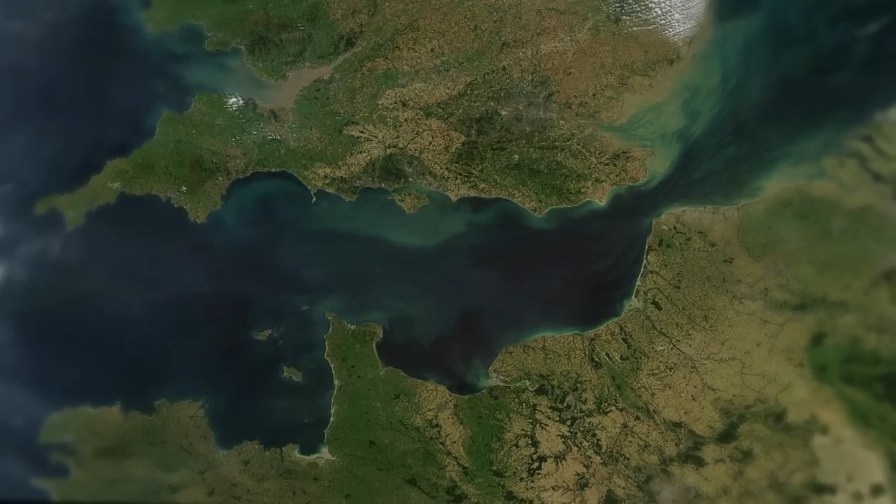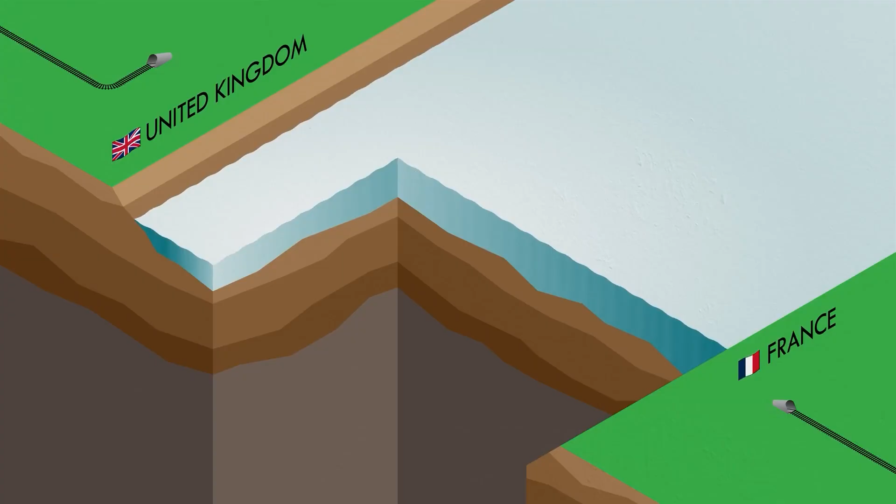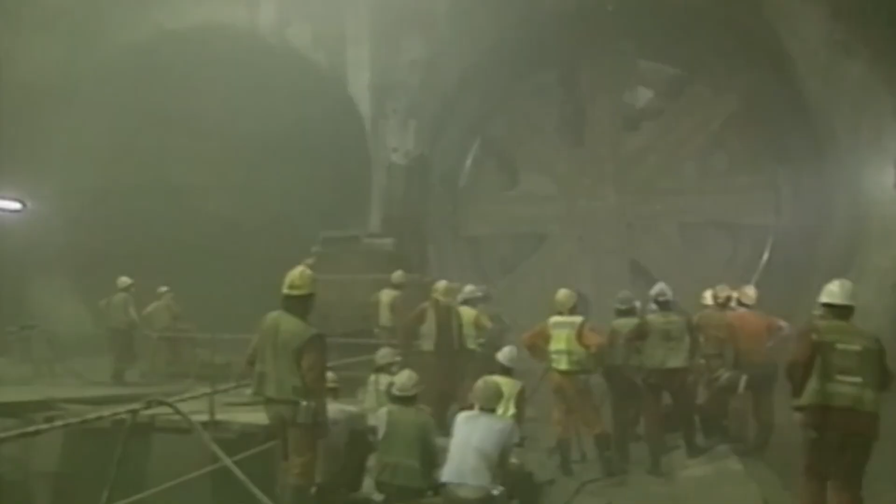Beneath the waters of the English Channel lies one of the most remarkable engineering feats of the modern era, the Channel Tunnel. Stretching approximately 50 kilometers, this undersea marvel links England and France, earning the title of the longest underwater tunnel in the world. The construction, which began in 1988, faced immense challenges, from precise digging to handling complex geological conditions beneath the seabed. 11 massive tunnel boring machines powered through chalk layers, resulting in 3 interconnected tunnels by 1994.

Initially estimated to cost £4.8 billion, the final price tag skyrocketed to around £9.5 billion. Despite these obstacles, the Channel Tunnel remains a vital transport link that reshaped travel across Europe and was even recognized by the American Society of Civil Engineers as a wonder of modern engineering.

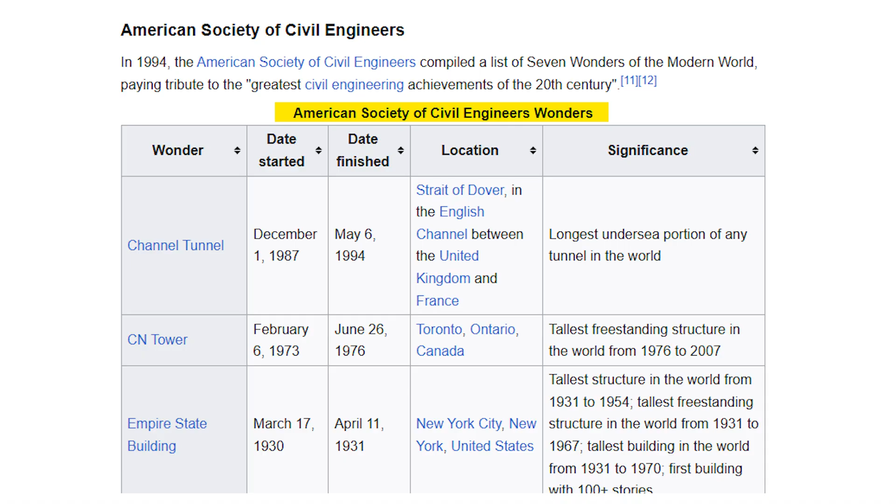But what made this engineering dream so difficult to achieve? And why is it celebrated with such a prestigious title? Let's find out. This is Megalith.

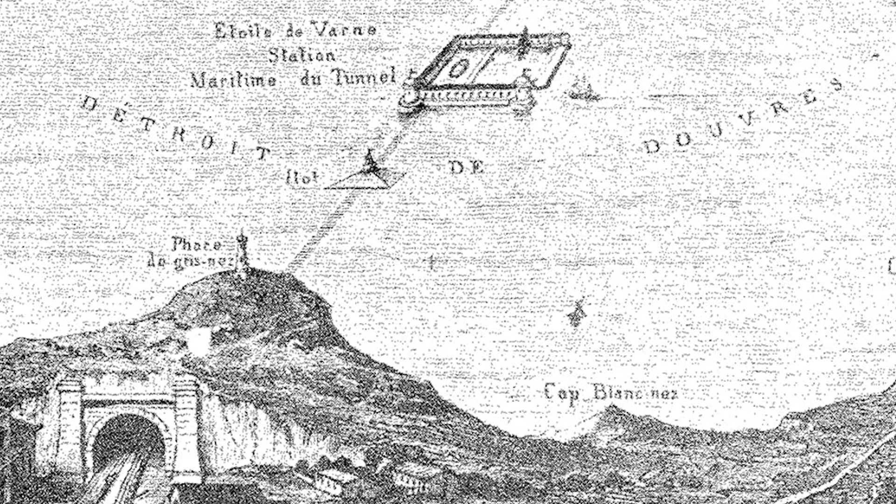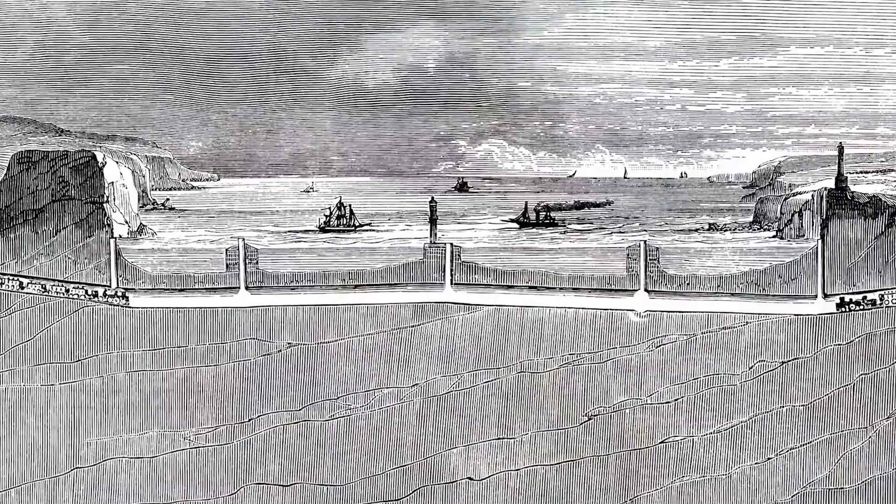reliable route. The growing economic ties between Great Britain and continental Europe made a permanent link essential, but previous proposals for a connection failed repeatedly due to political disputes, financial concerns, and national security fears. The dream of a fixed connection wasn't new. As early as 1802, a French engineer proposed a tunnel beneath the channel.

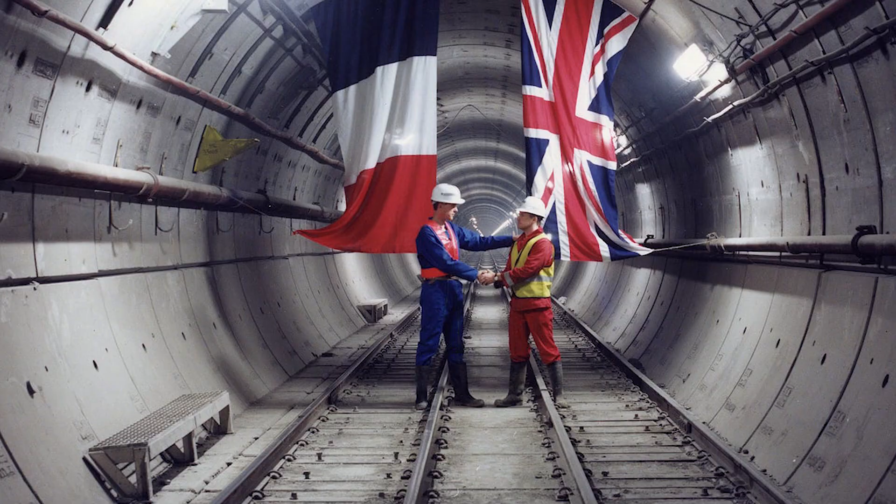However, it wasn't until the 20th century that technological advances made such ambitious plans seem feasible. In the 1960s, renewed interest led to more serious talks, but political hurdles remained. It wasn't until 1981 that the British and French governments began to collaborate earnestly. The turning point came with the signing of the Treaty of Canterbury in 1986, which formally committed both nations to construct an undersea tunnel, later known as the Eurotunnel.

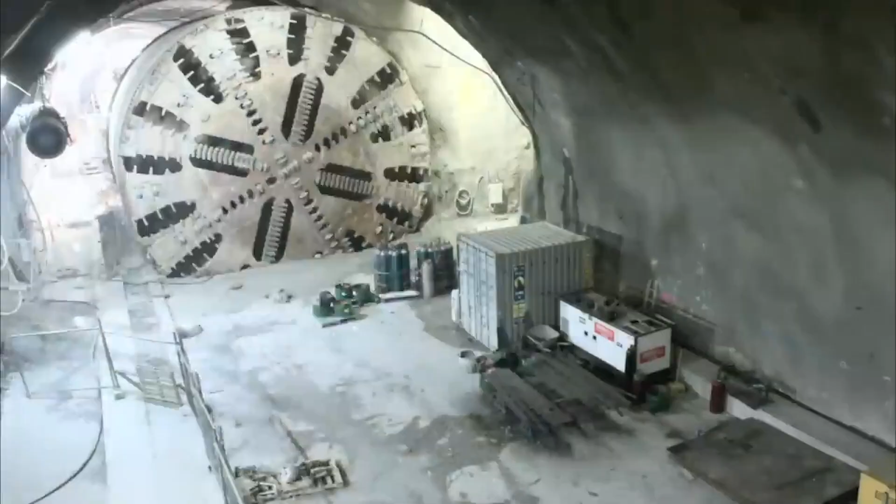Construction began in earnest in 1988, with teams working from both the British and French coasts. The project was an engineering marvel, relying on state-of-the-art tunnel boring machines to dig through the dense chalk marl beneath the seabed. By 1990, the tunneling teams met beneath the channel, symbolizing the historic link between the two nations.

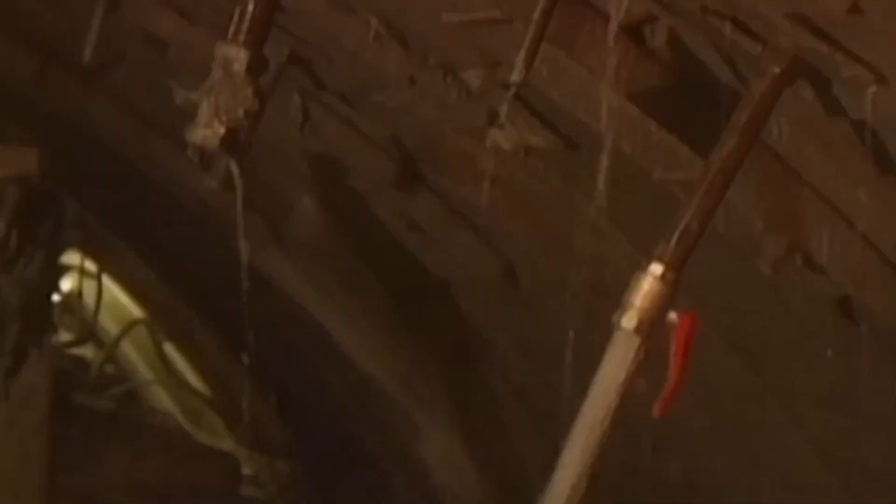However, the Eurotunnel faced immense challenges, including water leaks, financial strains, and safety concerns. Nevertheless, progress continued, driven by the potential economic impact and improved relations between the UK and France. On May 6, 1994, the Eurotunnel officially opened, marking a new era of cross-channel travel.

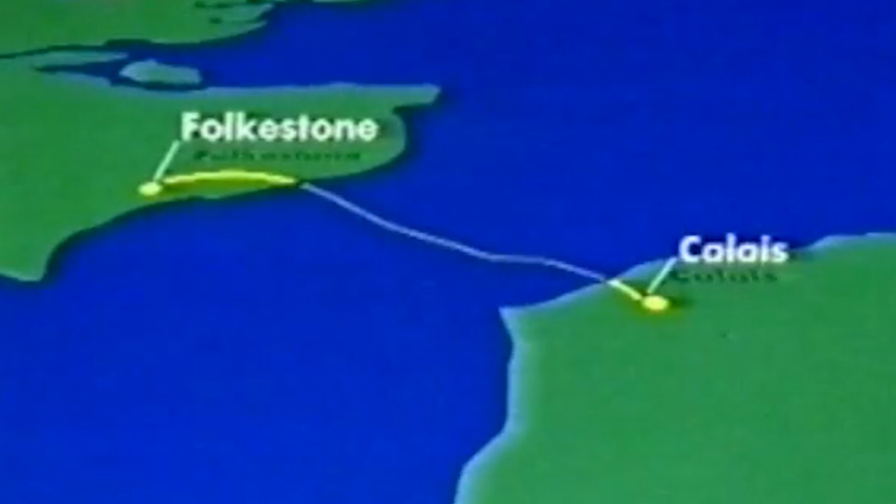Stretching over 50 kilometers, it became the longest undersea tunnel in the world, connecting Folkestone, England, to Coquelles, France, in just 35 minutes. The project wasn't only a triumph of engineering, but a testament to international cooperation, bridging the gap between two historic rivals and reshaping Europe's transport landscape. Today, the Eurotunnel remains a vital link, facilitating trade, tourism, and cultural exchange. But how exactly did engineers achieve this groundbreaking feat beneath the waves?

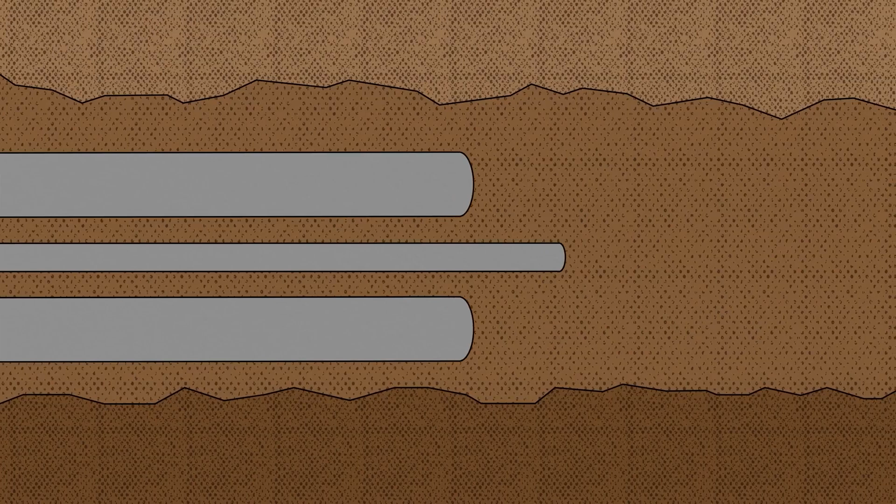Initially, the project required digging 3 separate tunnels, 2 main rail tunnels and a smaller service tunnel positioned between them. The main tunnels, each 7.6 meters wide, were designated for train movement, while the central service tunnel, measuring 4.8 meters in diameter, was primarily for ventilation, emergency access, and maintenance.

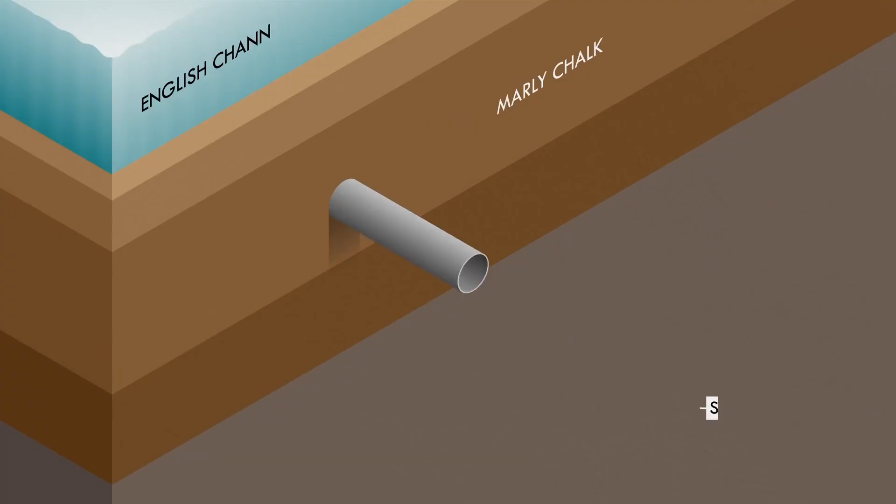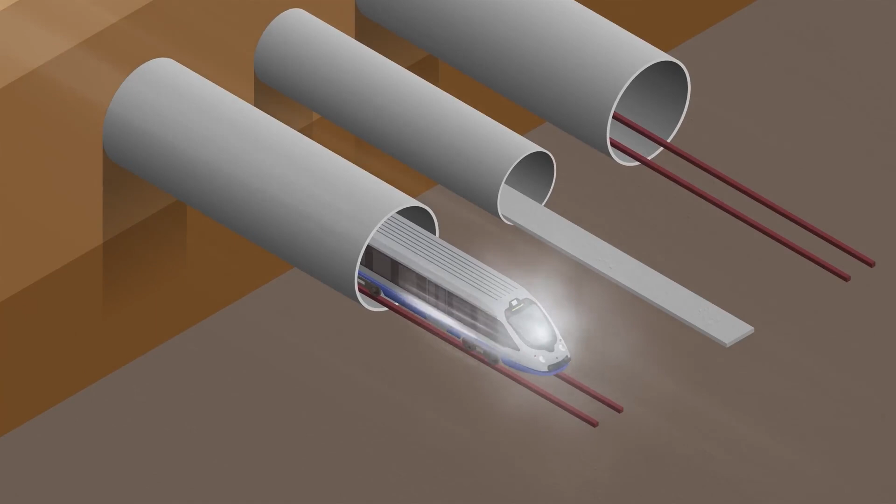The tunnels were built to run parallel to each other, with cross passages connecting them every 375 meters to facilitate safety evacuations. The meticulous design ensured the safe operation of high-speed passenger and freight trains that would traverse the tunnel. The construction kicked off with the deployment of 11 tunnel boring machines, or TBMs, 5 on the French side and 6 on the English side.

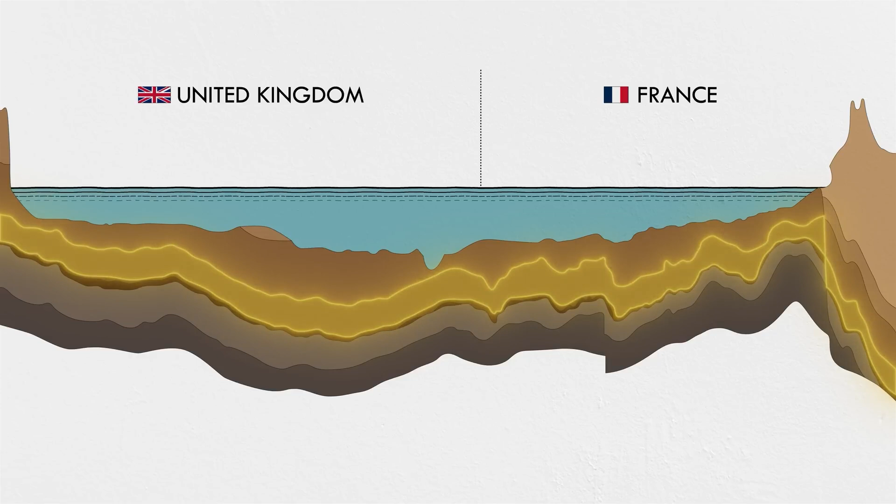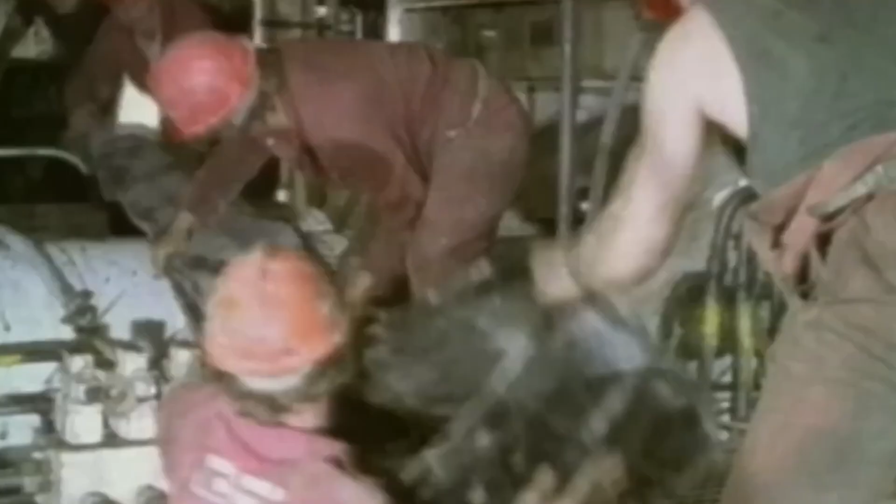These gigantic machines were essential in cutting through the chalk marl, the chosen geological layer, due to its optimal combination of impermeability and ease of excavation. This geological stratum offered a stable digging environment and minimized the risk of water intrusion. On the English side, the chalk marl extended continuously along the tunnel route, while on the French side, the ground conditions varied significantly, requiring different tunneling techniques.

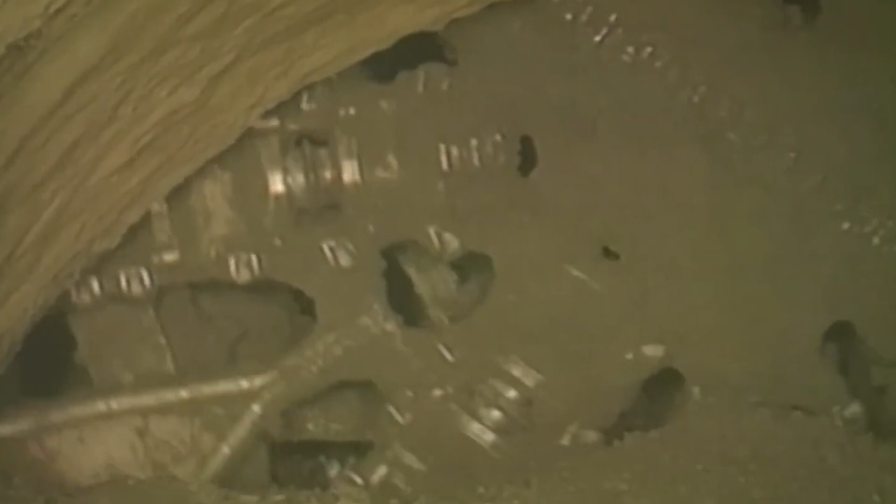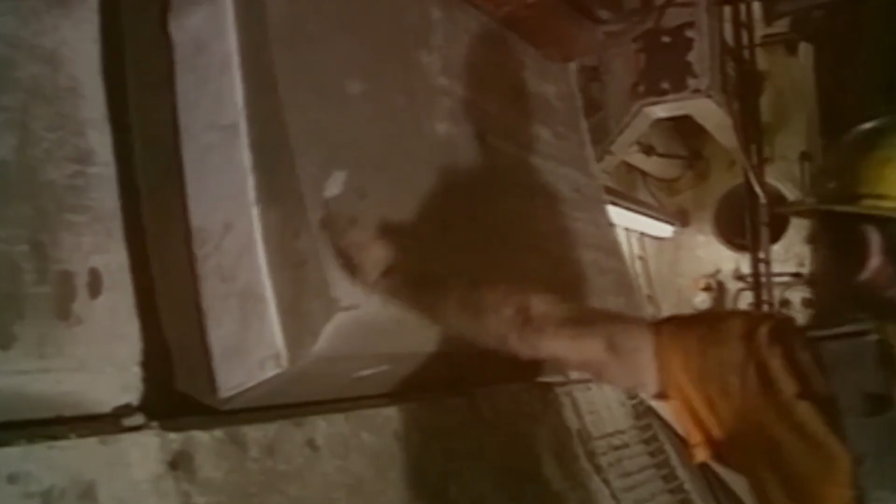As the TBMs advanced through the chalk, the spoil, or excavated material, was continuously removed using conveyor belts, and the tunnels were simultaneously lined with cast iron and reinforced concrete segments. These linings served to provide structural stability, waterproofing, and resistance against the immense pressure from the surrounding seabed.

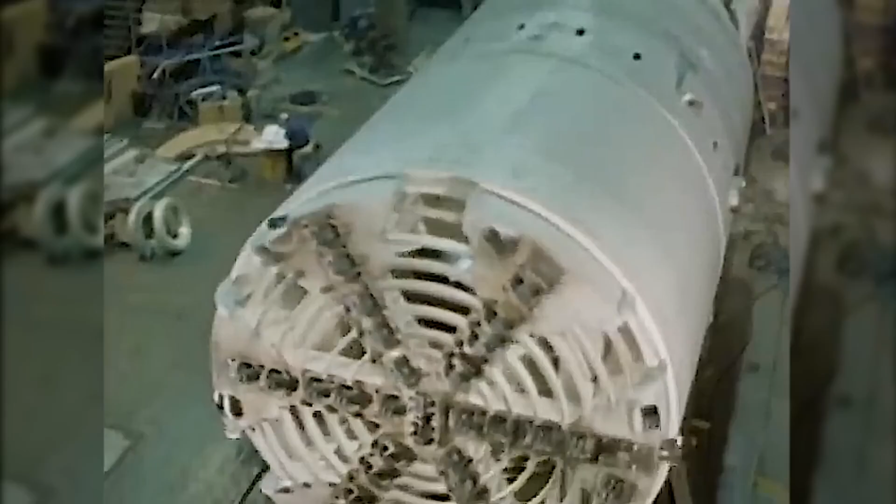While the English side primarily used open-face TBMs to bore through the relatively dry chalk, the French side faced wetter and more unstable conditions. This required the use of closed-mode TBMs, which maintained pressure to prevent the inflow of water and maintain the structural integrity of the tunnel walls. This approach allowed for safer and more controlled excavation despite challenging conditions.

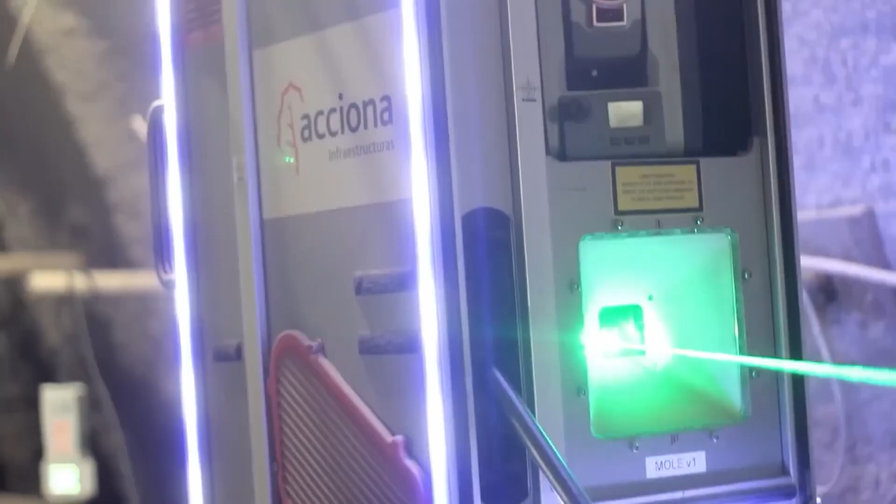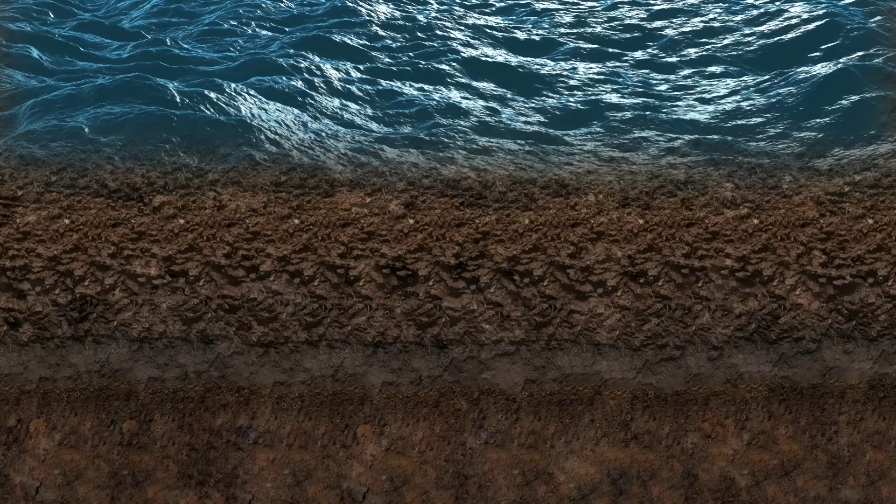One of the most critical tasks during construction was aligning the tunnels perfectly beneath the sea. Advanced lasers and surveying tools were used to ensure that the tunnels from both the French and British sides would meet precisely in the middle of the English Channel. This alignment required precision to the millimeter, as even a small deviation could have led to significant delays and potential safety hazards.

The meeting point of the service tunnel, which was the first to be completed, was celebrated with great fanfare on December 1, 1990, when workers from both sides shook hands for the first time beneath the sea. A symbolic moment marking a historic connection between the two nations.

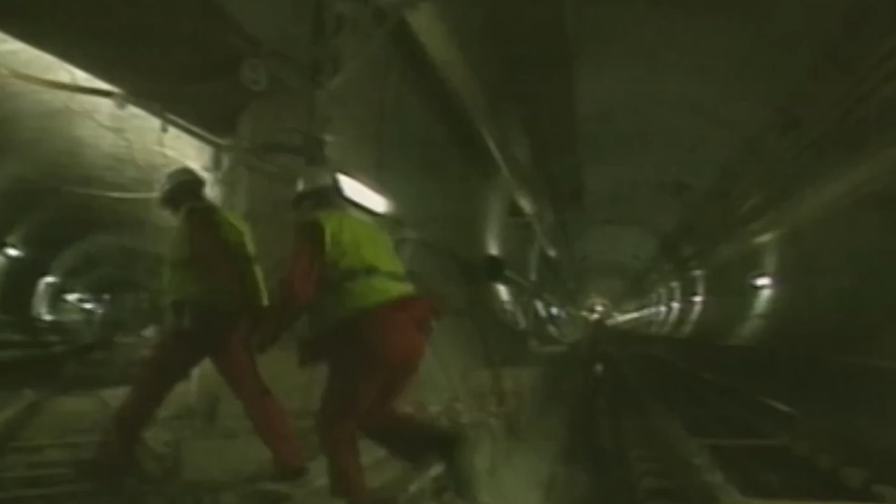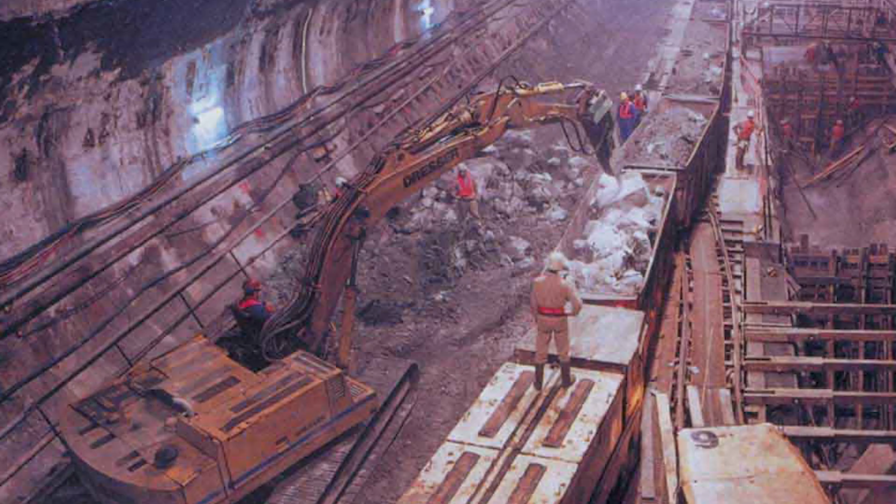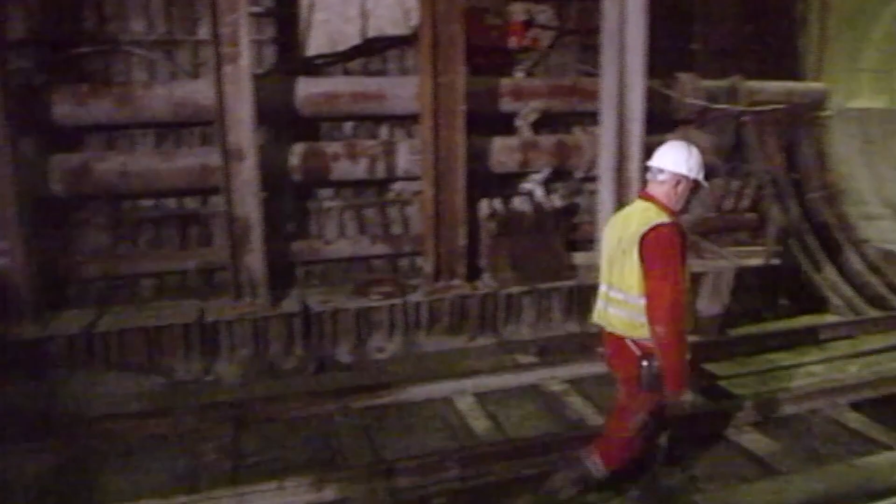However, constructing undersea crossover caverns was among the most ambitious elements of the project. These crossovers allowed trains to switch between tunnels if necessary, enhancing operational flexibility and safety. The caverns, remarkably spacious, were carefully designed to maintain stability under the seabed. Engineers had to excavate enormous amounts of material while preventing collapses or water ingress. The process involved precise drilling, grouting, and reinforcement to ensure that these cavernous spaces could withstand the pressure exerted by the water above.

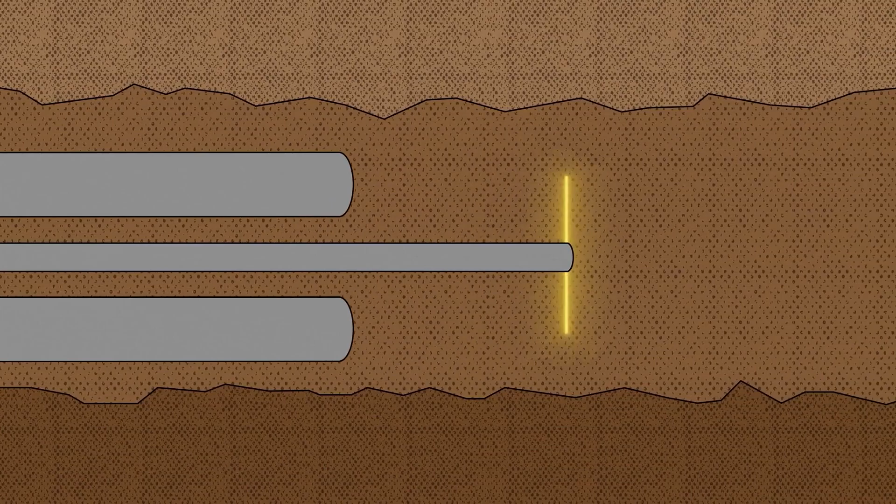The service tunnel played a pivotal role throughout the construction. Acting as a pilot tunnel, it preceded the main tunnels by at least 1 kilometer to identify potential hazards such as geological anomalies or high water pressure zones. It was also used to transport workers, materials, and machinery, making the construction process faster and more efficient. Additionally, the service tunnel was equipped with a specialized transport system to ensure quick evacuation and access in emergencies, further enhancing the safety of the entire project.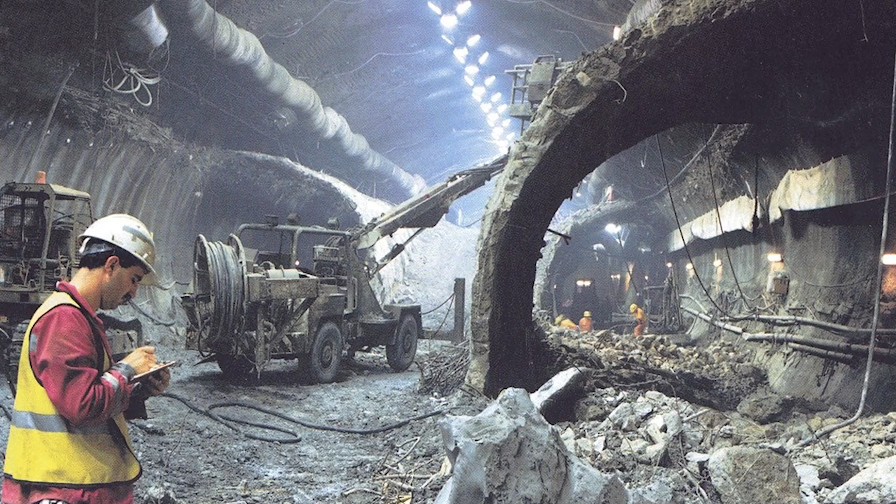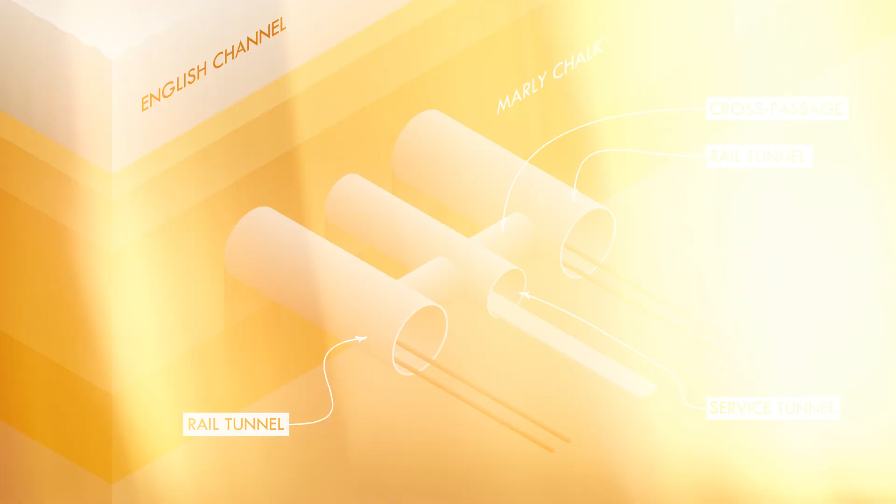Ventilation and cooling were other significant challenges tackled during construction. The ventilation system was designed to maintain higher air pressure in the service tunnel than in the main tunnels. This pressure differential was crucial for preventing smoke or fumes from entering the service tunnel in the event of a fire. To regulate the high temperatures generated by train movements, a comprehensive cooling system was installed, comprising chilled water pipes that extend along the tunnel's length. These measures ensured a comfortable environment for passengers and reduced the risk of overheating, which could affect both the trains and the tunnel structure.

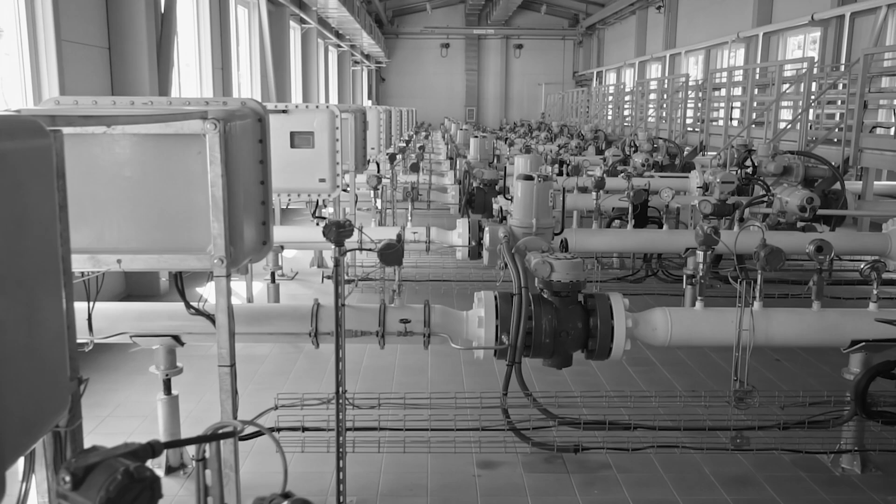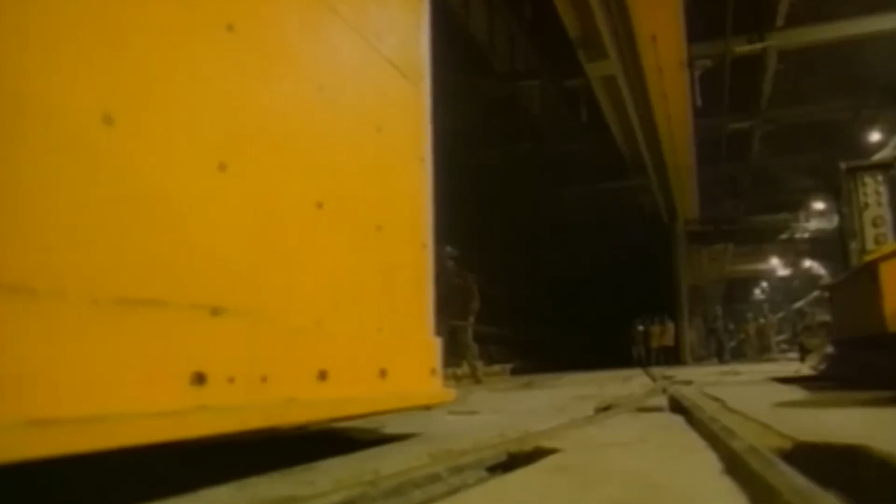Water drainage systems were also crucial to the success of the tunnel. Pumping stations were strategically placed along the tunnel to remove water from rain, seepage, or accidental flooding. This network of pumps worked in tandem with the tunnel's design features to prevent water accumulation, ensuring the tunnel remained operational even under adverse conditions. The drainage system was designed to handle the immense water pressure from the surrounding seabed, showcasing the detailed engineering that underpinned every aspect of the Channel Tunnel's construction.

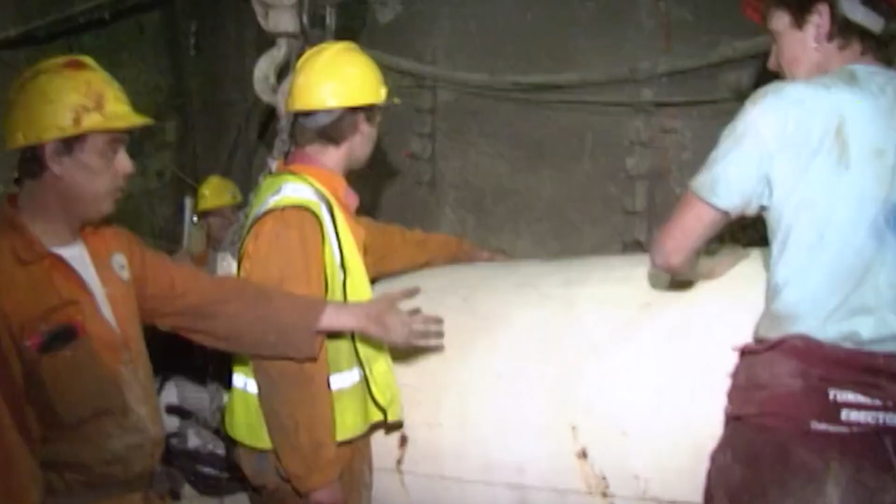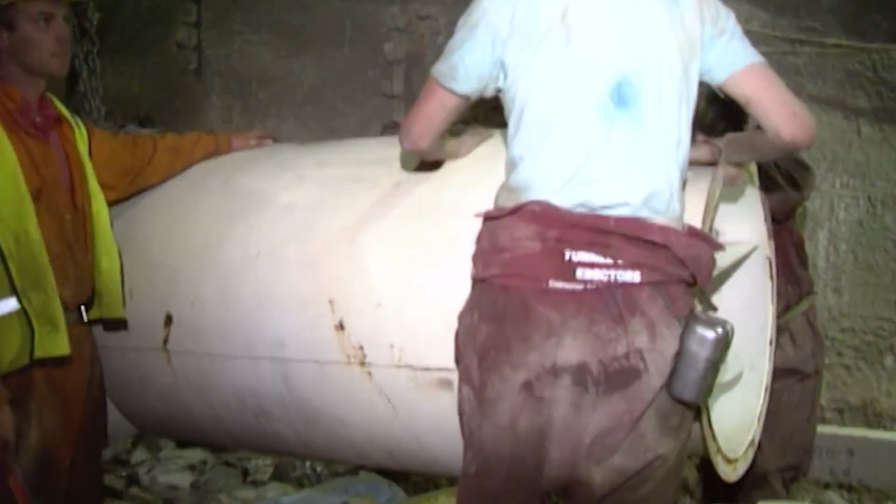Despite the significant advancements and achievements, the construction faced numerous challenges. Technical issues such as unexpected geological variations on the French side and equipment breakdowns led to delays and increased costs. The project was originally estimated at approximately £4.8 billion, but ultimately reached around £9.5 billion by the time of its completion in 1994. Safety concerns also demanded design modifications, adding to the overall complexity and expense. However, the engineering teams remained resolute, adapting to challenges with innovative solutions and maintaining a strong focus on completing the project.

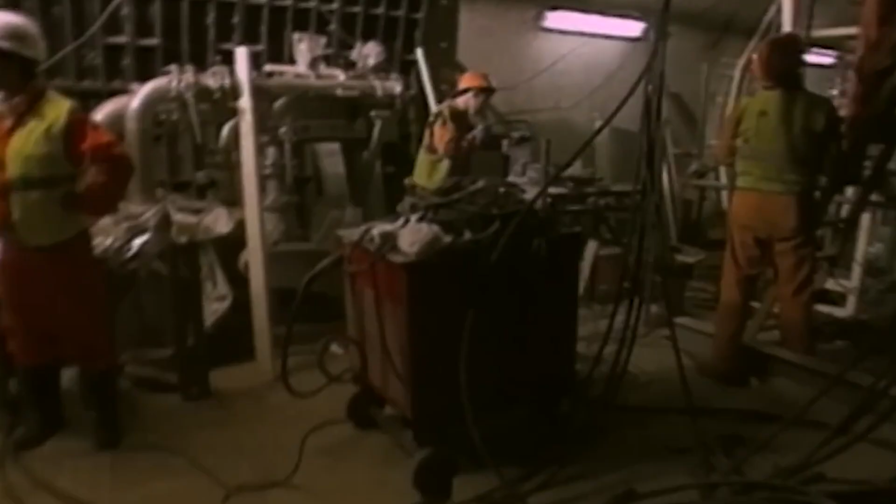The Channel Tunnel's construction overcame numerous technical, financial, and logistical challenges to create a vital transportation link between two countries. And it stands as a symbol of what can be achieved through international cooperation and advanced engineering.